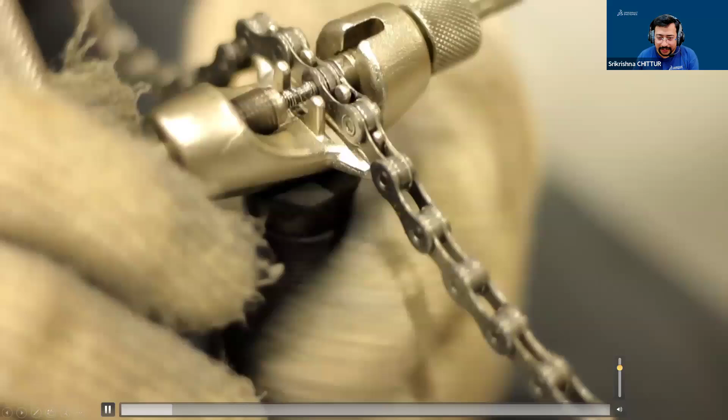I don't know if you guys can hear the audio. Can you? No, cannot hear the audio. Yeah, but this would be great for Leandro to kind of talk a little bit about Caloi as a company.

Yeah, so Caloi was founded in 1898, by Luigi Caloi.

Today we have 126 years, so it's a long time for manufacturing bikes. We have the office in São Paulo, Brazil, and the factory at Manaus, which is like 3 or 4 hours from São Paulo.

Today we have the Caloi team of athletes training, including the guy who won the World Cup last year. He's ranked, but today is a training day for the other Caloi athletes, as they compete for the leagues inside Caloi, World Cups, and other championships inside Brazil.

We also have good news regarding the off-road bike we developed last year. Today we're seeing good results with these athletes who represent Caloi inside Brazil and out in the world.

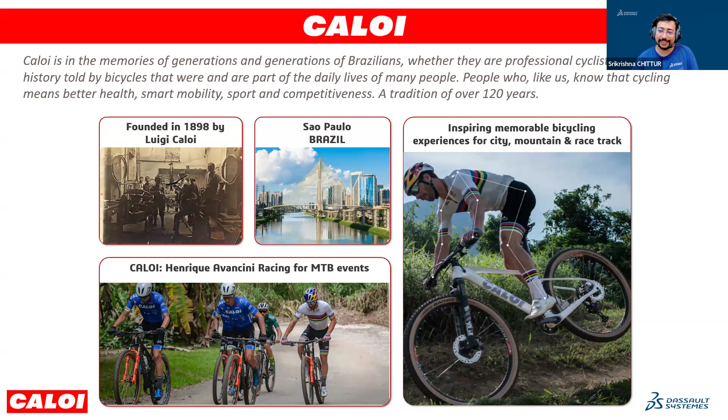Okay, I think I got the video working. It's a pretty cool video, we should share it with the audience. Let's try it one time. Alright, let's see if it plays. Come on, do you hear the audio?

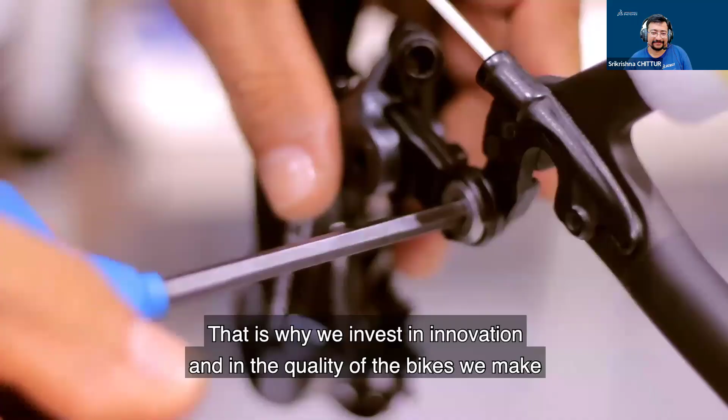Wow, that's a really, really nice video, man.

Nice video. It covers your entire portfolio and how closely it is connected to the life of Brazilians.

So let's switch gears. Tell us about how you're leveraging SolidWorks to design and visualize your bicycles. We'll get into details of bicycle development later, but just at a high level, we see these models here. Tell us about it.

This is a kind of model that launched last year, 2023. We launched around 4 models: Explorer Sport, Explorer Comp, Explorer Expert, and Explorer Pro. These are 4 different models.

These are different levels for users, because each model has different components at the entry level and the high level. In each model we have 5 sizes, from extra small to extra large, in different colors, so there are many bikes for the public — different colors, different sizes, and also different mechanisms, like gear and sprocket mechanisms.

Materials would be different too. For example, the Explorer Comp has 8 speed, the Explorer Expert has 9 speed, and the Explorer Pro has 10 speed.

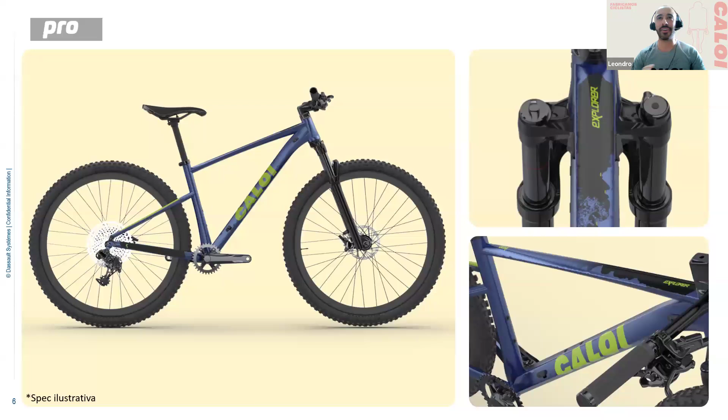For explaining the day-to-day process of frame development, I will share my screen on SolidWorks to introduce you to the day-to-day work of me and Danielle in developing frames. Excuse me, let me share my screen just a second.

One question before we jump there — when Ronit and I were talking to you yesterday, you mentioned that these are renderings done in SolidWorks Visualize. Is that right? Yeah, exactly.

When I finish the 3D drawings, we share them with my design team to make our renders through the software Visualize. These renders are used to decide colors in meetings with directors and management, who decide what color to launch. It helps bring realism to the bike at the end of the process, so we can decide with the team, the commercial team, and the directors, and present the cost of the bike and everything else.

Man, that rendering is amazing. I'm not sure if you guys are as impressed as I am, but that looks like a great bike rendering, so great job on that. It's very close to the physical, real look. At some point we'd love to see the real bike placed next to the rendering, side by side. Yeah, very cool — we've seen so many different types of bikes on your website.

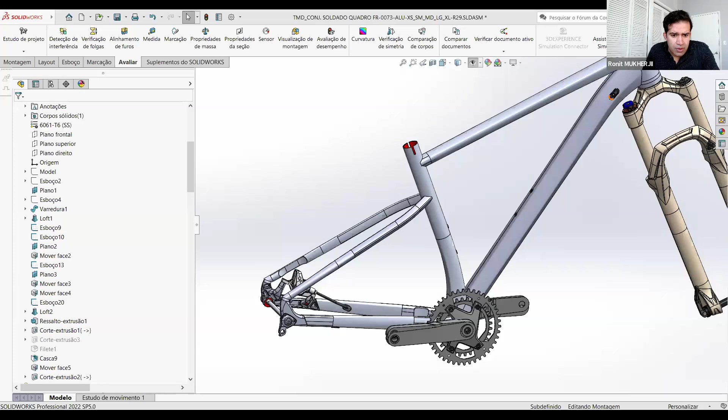Here we go, something's happening on screen. This is the model that you saw in the previous slide. So here's how the structure of this bike works, let me explain a little more about the frame.

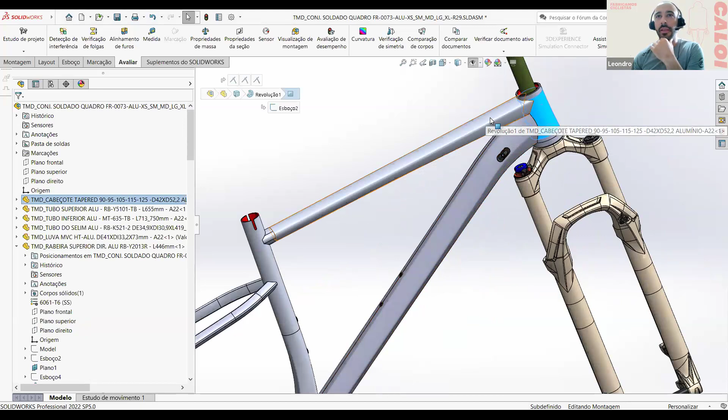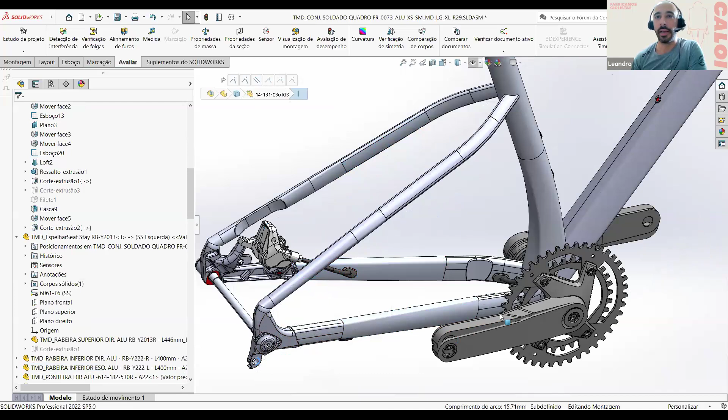We have this tube which is called the head tube, and we have the top tube. This tube is the down tube, seat tube, and we have two seat stays, left and right, and the chain stay, left and right, with dropouts and a hanger that we can assemble onto the derailleur, and in the middle we have the bottom bracket. Before this, we begin to develop the geometry — just a second while I look for the geometry here.

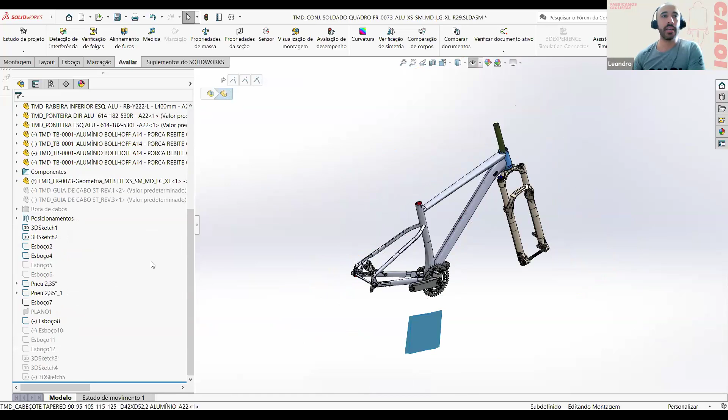Let me see, I don't find the geometry. Oh, okay. So I didn't find the geometry here, just a second, I'll open this here. Oh, there you are, okay. It's very slow, my computer.

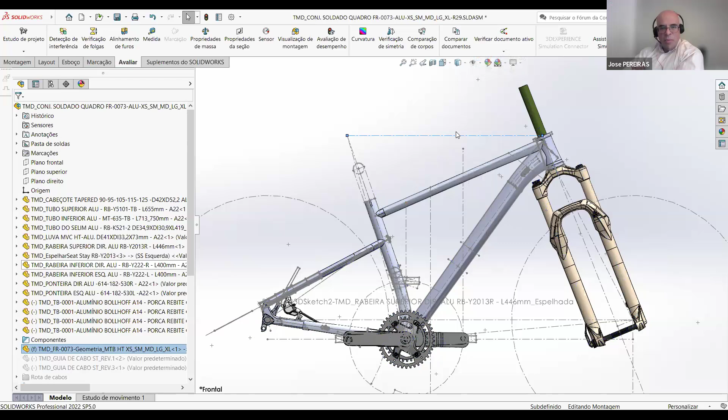No worries, we see the drawing. Yeah, we see that. All the sketches, let me hide some. So this, Leandro, is the first sketch that you based on for drawing every single 3D part, right?

Exactly. Before constructing the bike, we decide the measurements we choose for this bike, because the measurements determine if we have more velocity or more downhill capability, more dirigibility. This measure decides the behavior of the bike when you ride on the roads of the city or on the trail. So this part is very important for us when deciding these measurements of the frame.

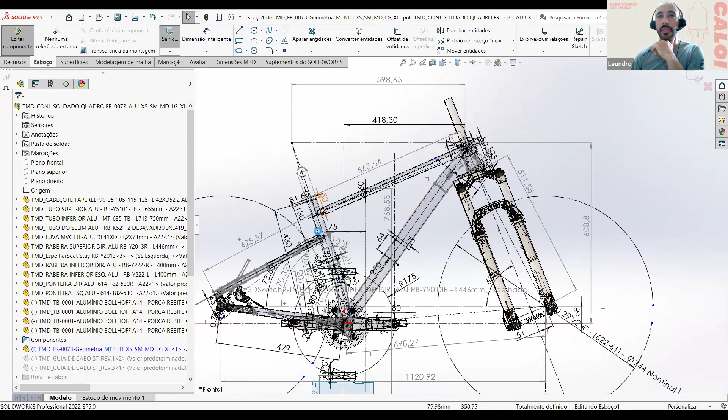This is the initial step that defines how comfortable a ride will be for someone. We do research on the website, for development, with colleagues like other brands inside Pon Bikes, and decide the measurement.

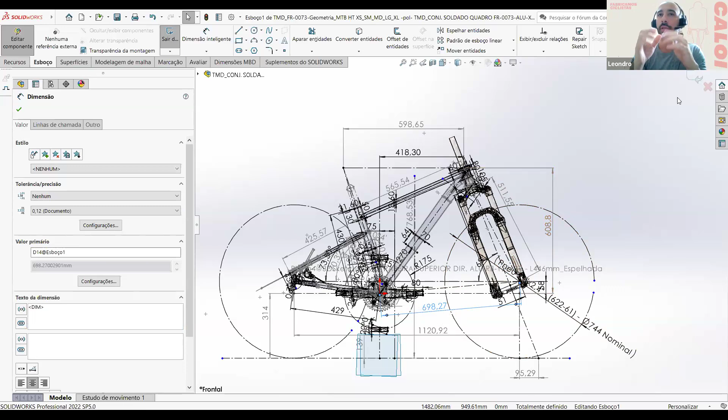We talk with my director and decide for this product, and when this measure is consolidated, we begin to develop the frame and how to construct the tubes. We talk with the design team for ideas on what profile of tubes we would like to input into this kind of project.

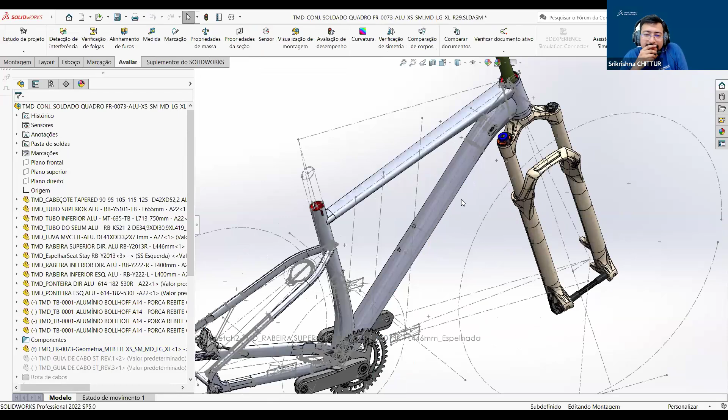So, until arriving at the assembled bike. The parametric geometry for all sizes, Leandro? Yeah, exactly. Daniel said that's very important - how to construct the many sizes, from extra small to extra large.

We use the tools inside SolidWorks that give us parametrics for these sizes, so I can change the size, and it's easier to show the other guys the proportions of the frame relative to the size.

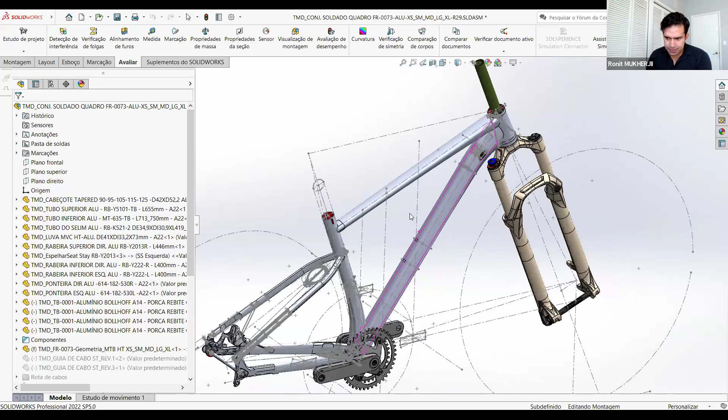So do you guys use design tables for that, or how do you manage the configurations? In this moment I don't have a configuration, but we have a lot of models that have this configuration. So another part is I make analysis with components, like for example, you have a suspension fork in the front of the frame.

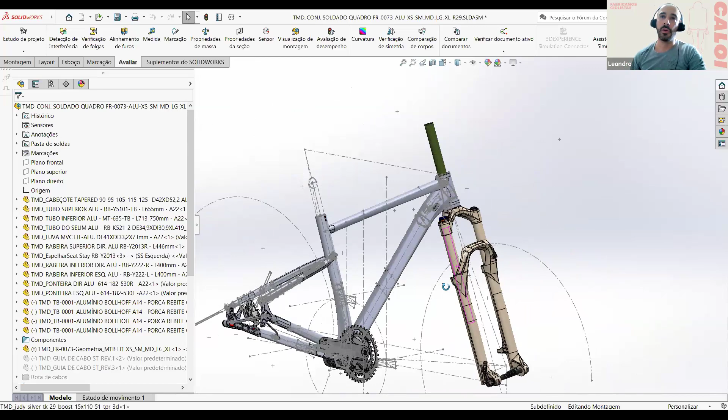We analyze if I have some interference when we give the circle of the fork suspension. We check if we don't have an interference with a down tube like this. We also make the interference check with a crankset and a chainstay, so you need to make sure.

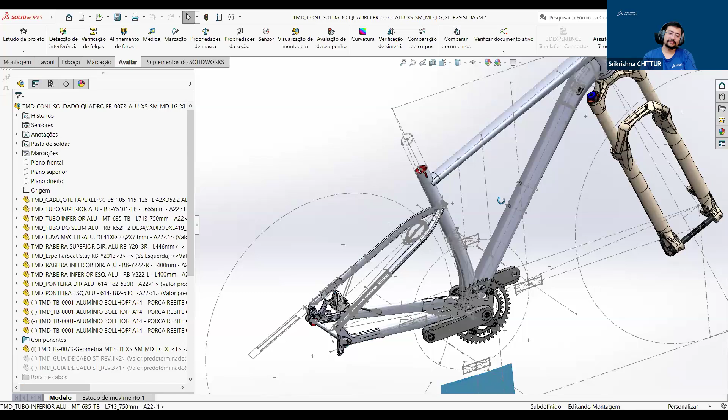We make the analysis with the tire, checking if we have good clearance between the tire and the chainstay. So these are the main parts that we analyze in this process together with the specification team.

Okay, this is very interesting. In fact, we got two questions from social media, it would be great if you can answer that. Can you bring back the geometry? Can you show the geometry again real quick? I think these would be super simple questions for you, but okay, let's go.

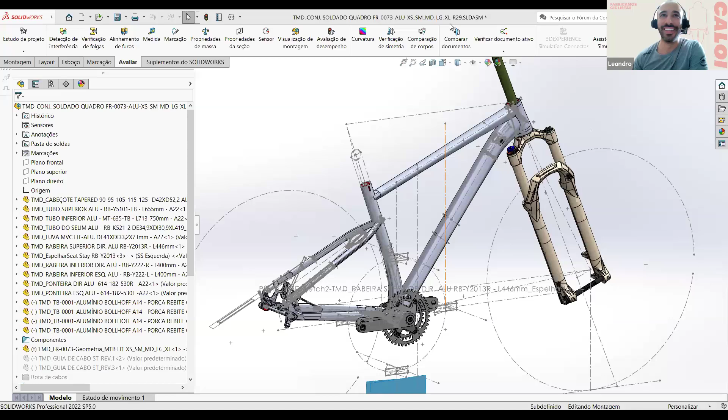I already saw, Sri Krishna, while we do that, the aspects of SolidWorks that I already showed them was being able to create amazing renders without having a product ready. And this other aspect Leandro mentioned was interferences. You got an interference check, we had not thought of that. That's pretty cool, so many components in there, so much movement happening, of course we gotta look for interferences.

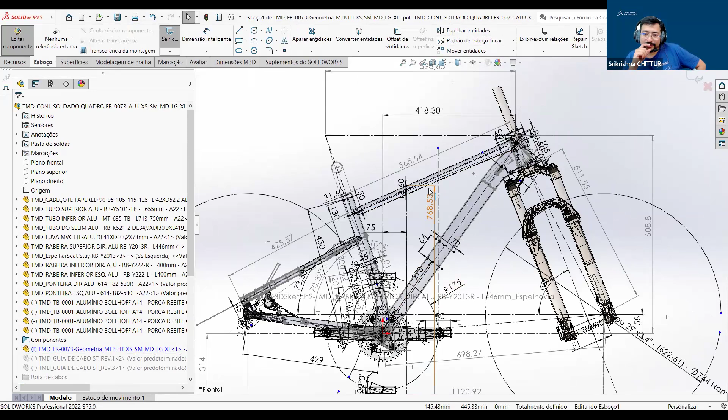That's amazing. So can you get out of the sketch, Leo? Let's look at the 3D geometry real quick. Okay, exit from the sketch. Yeah, the sketch. So now can you zoom near the connection of head and top tube?

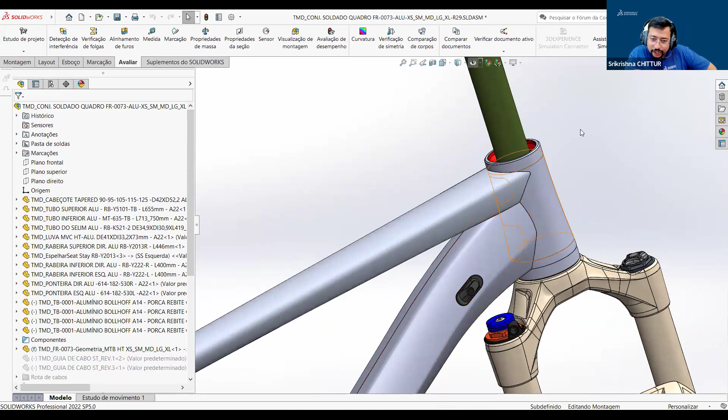Top tube, okay, so right here. So there's a hole with a black closing, right? There's a hole on the side. So one of the questions was, hey, isn't that hole introducing stress concentration when you're riding? Yeah.

We will arrive at this part when I talk about the tests of the bike. So we understood beforehand what's the better point to put this hole to avoid extra stress on the bike and avoid the appearance of a crack. So we already make the tests before the launch of the frame, we have to pass the five tests that I will comment on in the next slides.

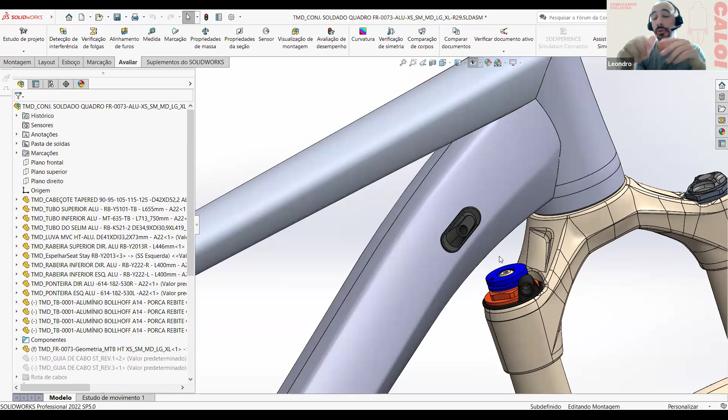But sometimes we have a problem about this hole. We can move it to a better position to avoid this kind of stress. But these are good questions because sometimes we have this problem.

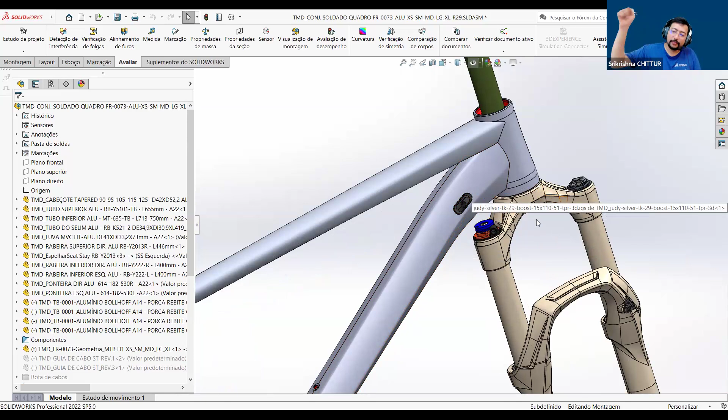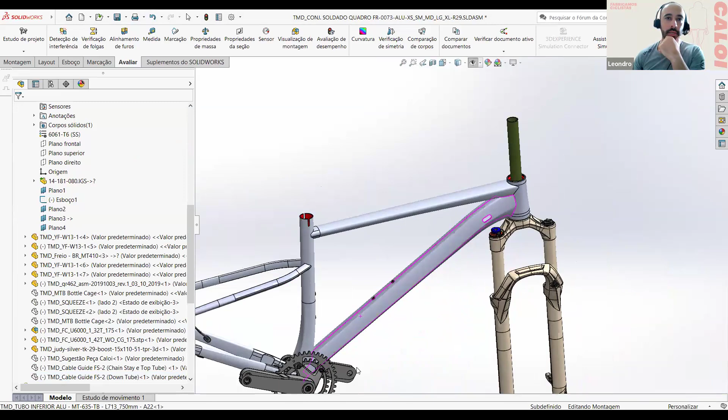But the reason you have a hole there is to route the cables from outside to inside, right? Yeah, let me hide this, so, on both sides. Ah okay, so that's where the cables go inside that tube and they come out from the bottom. Yeah, exactly. I think that answers one of the favorite questions on LinkedIn.

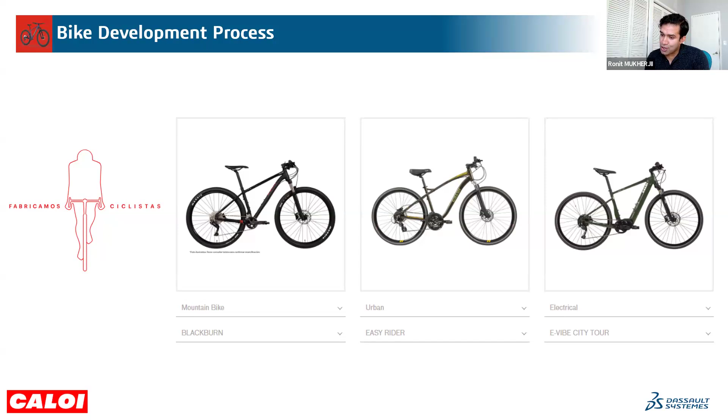It's a lot of critical goals over there - you want to make it lightweight, you want to make it strong, you want to make it last for a long time. And how do you do that without the necessary tools to tell you that information? So I did see the next slide accidentally, and I saw some tests over there. So I'm already curious, and I love testing too. So what is happening over here?

We showed everyone the standards we have in the world of bikes. The first standard is ISO 4210, specifically for mountain bikes, urban bikes, city bikes, and everything for 29 inch bikes. ISO 8098 is a standard covered for young bikes. And the last one is standard EN 15194, which covers e-bike frames.

So we have three standards covering the tests we need to make after the process of developing prototypes. With these tests, like I said in the previous slide, we get the certificate of the product, where you have durability, resistance, and so on.

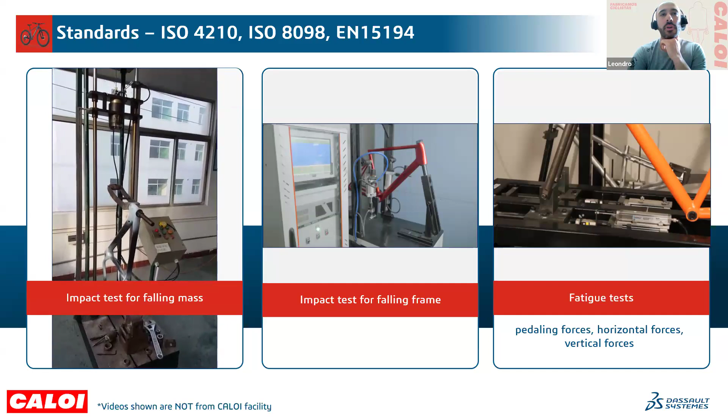Maybe we start with the impact test first. This test is for studying how the head tube decomports together with the top tube and down tube, testing resistance for impact, like a rock or anything. It's like a crash test, a high energy event, and we want to analyze that.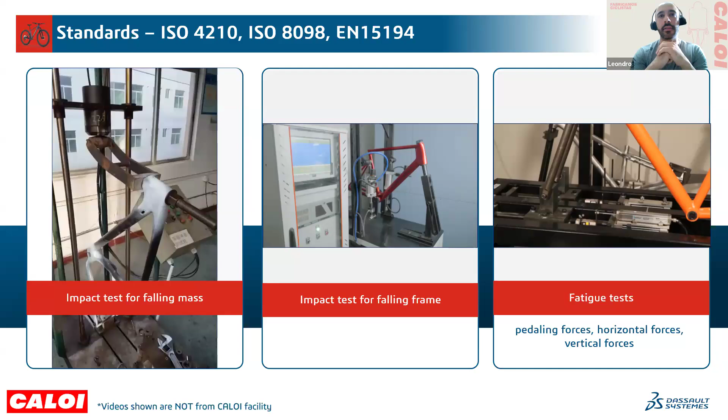What about falling frame? Falling frame is another impact test. For example, we put some mass in the frame to represent the weight of the person on the bike, and we test it two times with this.

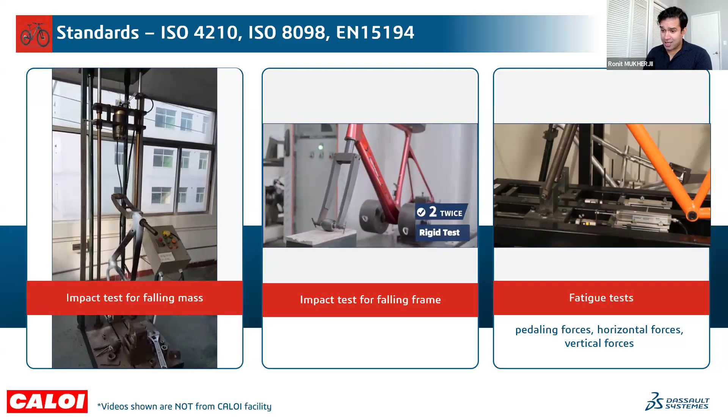I'm looking at a person doing a wheelie, and the wheel comes down, you want to be analyzing that. It's gonna be fine, guys, the bike is gonna be great. Keep popping those wheelies, smashing 100 kilos of wheelie.

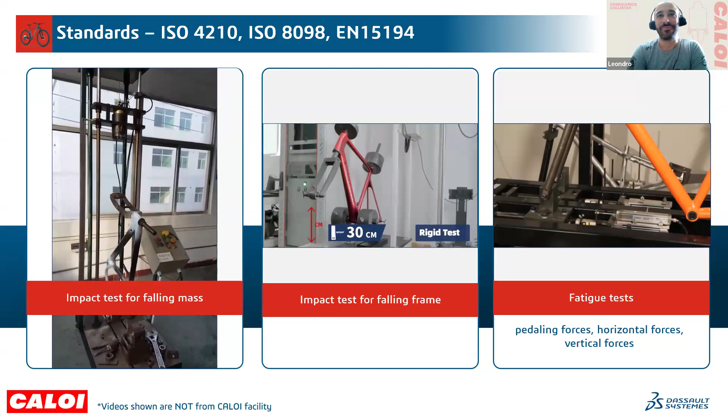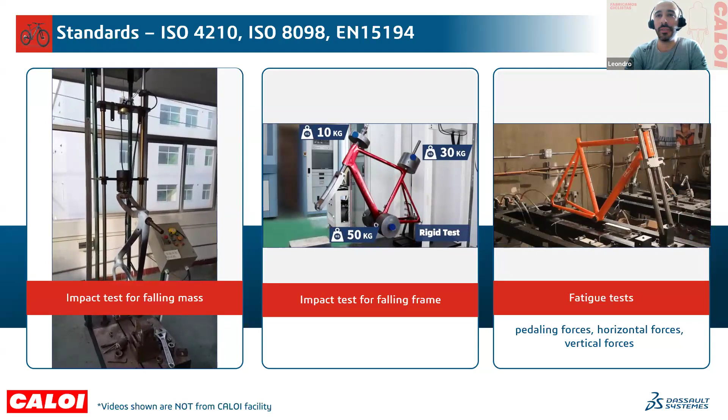Let's go from crazy riding to responsible riding, which is the fatigue test. This fatigue test represents the whole frame. We apply 1,200 newtons of force forward, and 600 newtons in reverse. The target is around 100,000 cycles. After this, if no cracks or breaks appear, the frame is passed and certified.

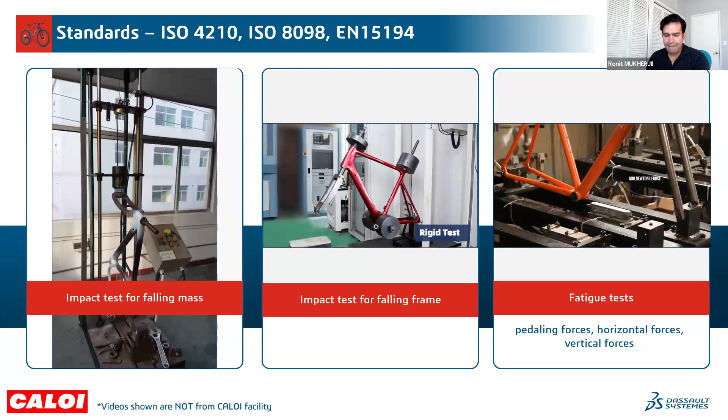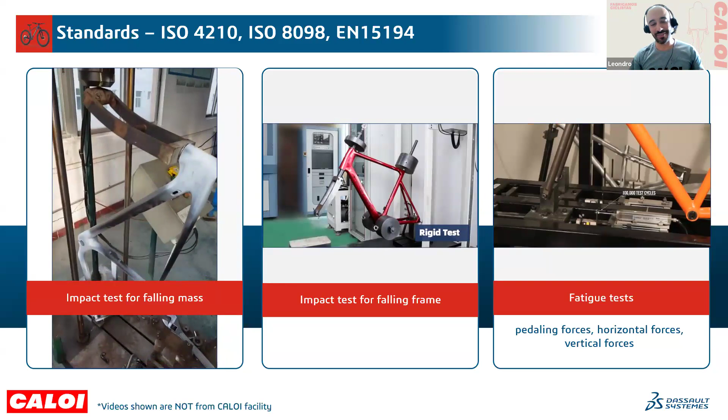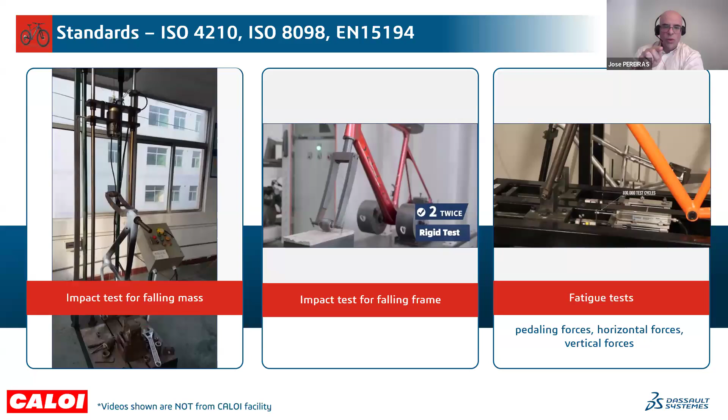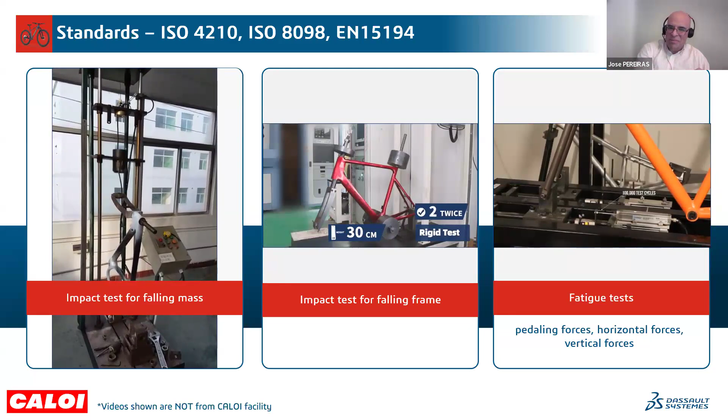Simulation is very important for you because you don't only have to pass those tests, you are optimizing those frames, looking for the lightest frame. So you're on the edge, needing to reduce mass versus strength. Yeah, exactly, that's one of the main challenges for us. You can create many possibilities before developing the prototypes.

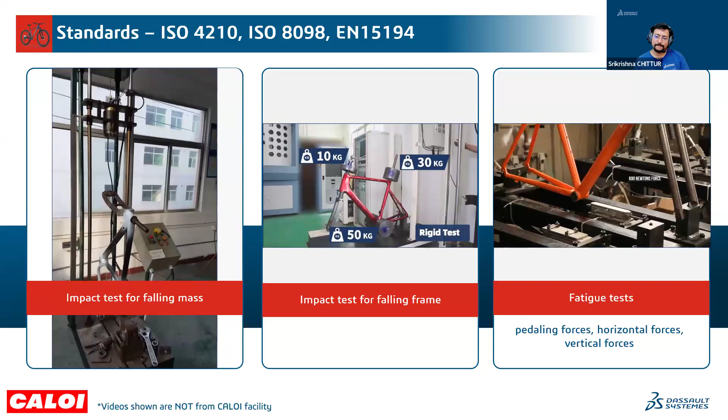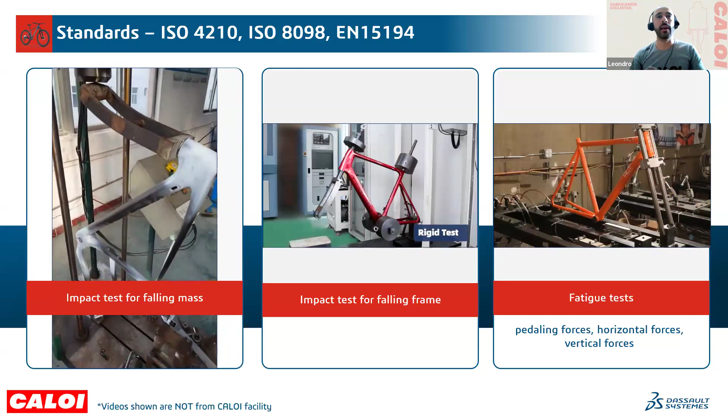Just out of curiosity, no numbers required, when you send these tests out to different labs to run, are they pretty expensive to run? We have the lab in China, with many brands inside of Pon Bikes sending their frames for this lab. We have the opportunity to send our prototypes to test our frames.

Are they expensive tests to run when you send them out? Not much, because it's inside the brand. Oh, it's internal, part of the brand. Got it.

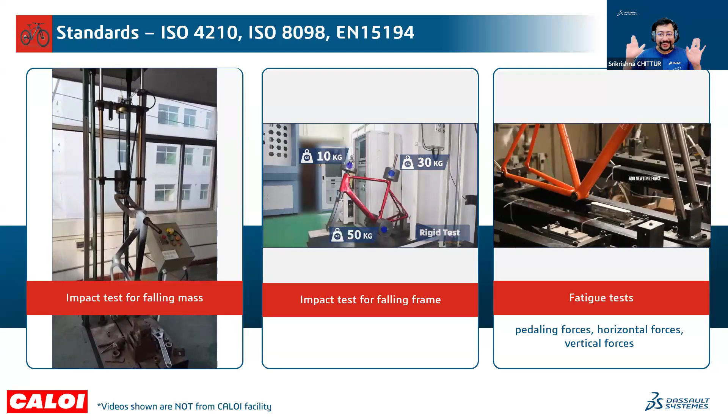Also, since you mentioned you have your own secret test setup, I just want to make it clear to everybody that all the videos you're seeing are not from Caloi. Yeah, exactly, it's just similar plans, the idea is there, but it's not all from Caloi.

This is a great topic for all of us. We've talked about your journey, and in every journey there are challenges. With a big product like Caloi, there are obviously engineering challenges you've come across and tried to overcome. Can you talk about some of the engineering challenges you've seen over the last few years and how you addressed them? Actually, as a company we always have challenges for our kind of products. With us it's not different, we have challenges, we have goals.

So when we talked with CADWorks about bringing Simulia, it was to bring this challenge for us: we've reached 42 models in 2 years of innovation with e-bikes. So this is the process of reaching these challenges, but I can say I have good numbers yet, in the process of developing the project with Simulia and SolidWorks together.

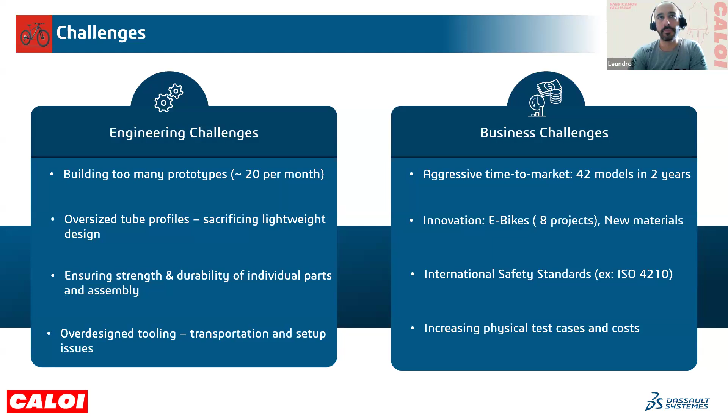These engineering challenges and business challenges, Srikrishna, this kind of resonates in pretty much all the product development companies. Yeah, this is great, it's very similar, just different flavors.

Believe it or not, we're already 3/4 of the way and we still haven't talked about simulation, so we're going to run through the next few topics quickly. Maybe you can share your journey of going from SolidWorks desktop to a cloud-based 3D experience platform for your simulation needs.

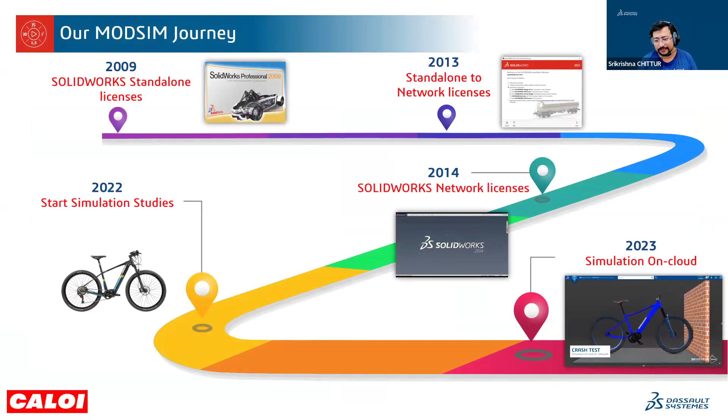Yeah, we've been a long time with Dassault Systèmes. We began with SolidWorks since 2009, and last year we got introduced to Simulia inside of Caloi together with the partner CADWorks. Today, in the process of learning the simulation, introducing the tests is standard inside of Simulia. As I said, I have good news, good numbers in this moment with Simulia - it's a good software, very simple to change the toolings inside.

It's very easy to customize it. It's basically like your virtual test environment, where you're able to create new virtual prototypes and run different types of tests without any physical effort or physical time.

Exactly. When you use SolidWorks together with Simulia, you can change your design and it automatically updates the framing and the simulation. It's very easy, very cool for us. That integration is very powerful.

So you stick with SolidWorks all around, and then a couple years ago you guys introduced simulation on cloud. You do your designs in SolidWorks, push the model into cloud simulation, run the test. If you don't like your results, you can make a change and auto update the designs in simulation. That's powerful, man.

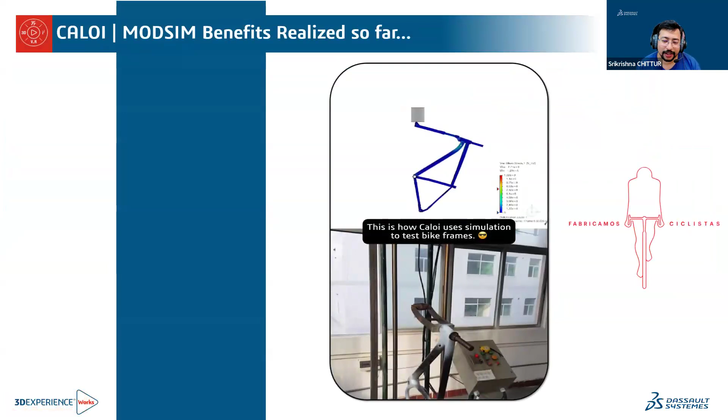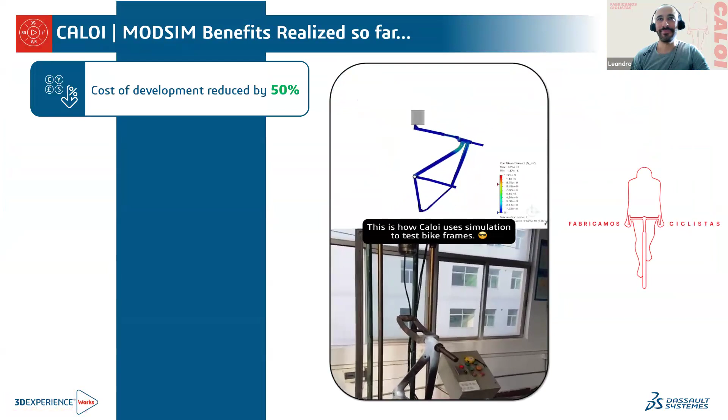Straightforward. And that actually puts us ready to talk about the benefits you guys have realized. When we were looking at this, we were blown away - because of using simulation. And for our audience, yes, we will talk about simulation in a few minutes. But because of simulation, you were able to reduce the costs, time, and effort. Tell us a little bit about this - this is really impressive.

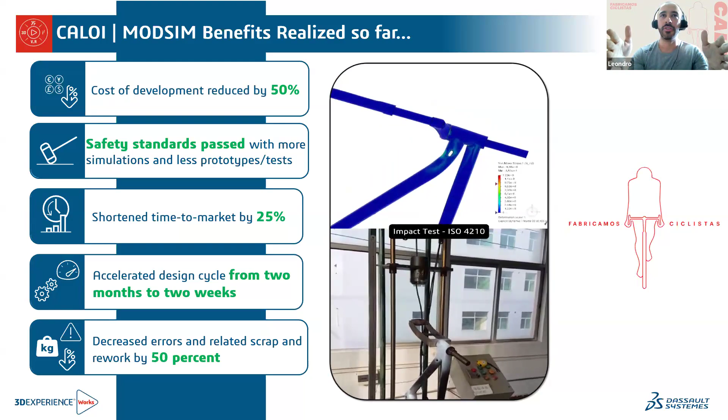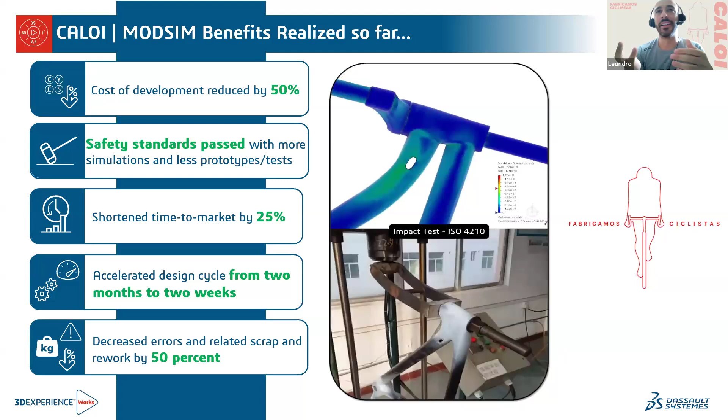Yeah, so 2 years ago we suffered - that's the starting content at the beginning of this meeting. We had a certainty that we have 3 months to develop the frame. So always we develop a new frame and we retest 2 times. So we're talking about 180 days - wow, 6 months. So we don't need this. We just need 3 months, we solved this problem, and the cost of development was reduced by 50%.

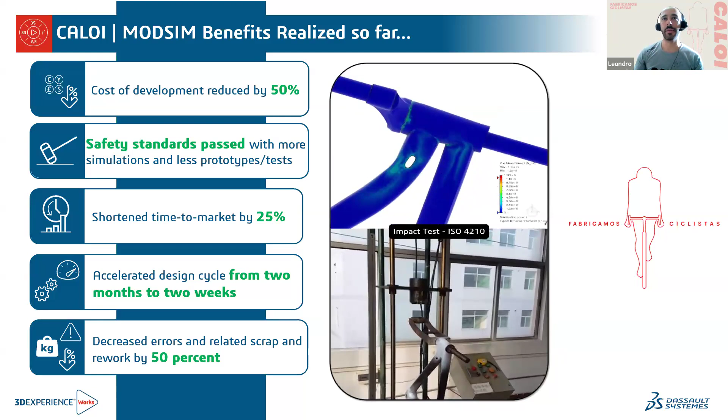Safety standards passed with more simulation, fewer prototypes, so you don't have to manufacture more prototypes. It shortens the timing and accelerates the design. We can launch before the competitors - so you can beat the competition. Yeah, and the companies are very happy with these results.

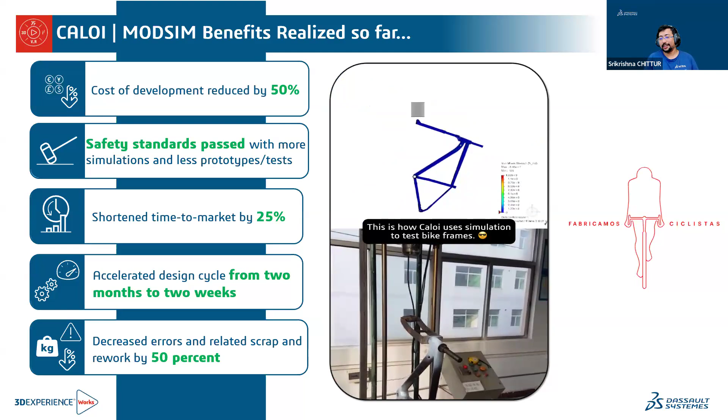Okay, I mean this is amazing, by the way. Kudos to you guys and CADWorks and our friend Jose who's on the call. Let's dive into the details of the simulation, which our audience has been patiently waiting for.

So let's talk about the first one, which is the impact test example from ISO 4210. You have explained the test earlier - correct me if I'm wrong - basically you have a specific load that you drop, and you check if the bike can withstand that load, several of those loads, right?

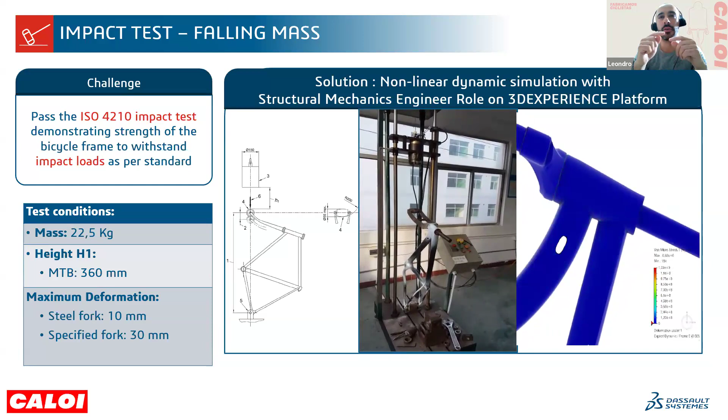Right, yeah, exactly. We have this test 2 times. And we analyze the difference of the measure that we call the wheelbase. wheelbase is the measure between the front axle and the rear axle. If I use the steel fork, the difference of the measure can't be more than 10 millimeters. If I use the fork suspension, it can be more, up to 30 millimeters. Okay, if it's less than this, the frame is passed.

Okay, so when you performed simulations to check for this deformation - obviously these are very complex simulations because there is contact happening, a lot of deformation, a lot of nonlinearity. This was done with the 3D Experience platform using the Abaqus solver. How close were the simulation results in comparison with physical tests?

Yeah, as I said, we are in the process of converging these numbers. So the idea is we make the simulation at Simulia, and at the same time we make the physical tests, and then begin to compare. And if it's not equal, we can change, for example, the thickness in the 3D drawing that's not correct compared to the real test. So we can find the points that bring the same numbers in the end of the comparison.

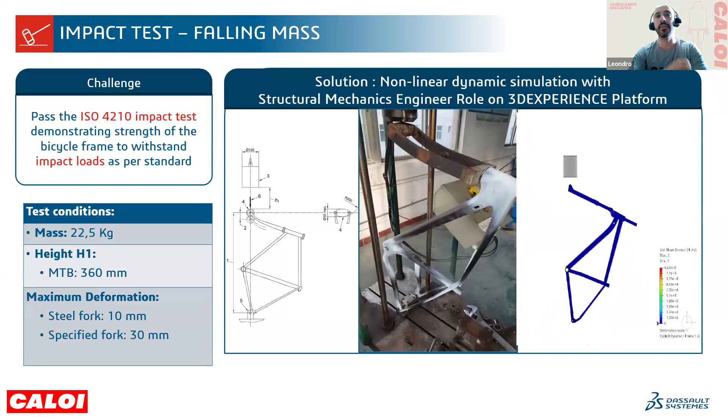So they perfectly match the physical test? That gives you confidence. So then you cut down the number of physical tests, replacing it with simulation. Exactly, right, CADWorks helped us with this matching of the tests. Very good - yeah, so the support part that you mentioned earlier.

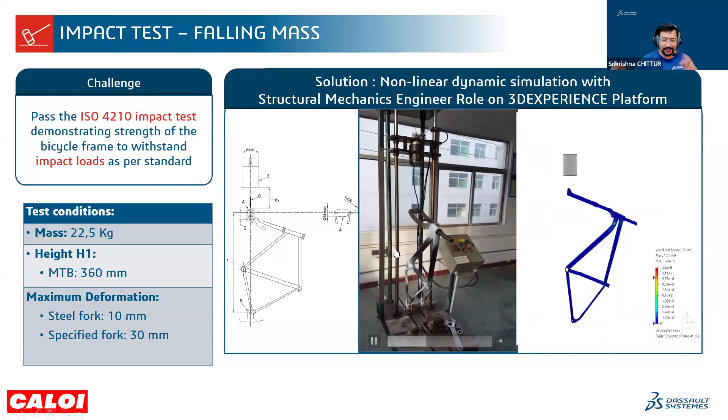And just for the reference of our audience, the simulation results you're seeing are from Caloi, but the physical test facility is not from Caloi because it's secret. But this is standalone - we make a similar version of this test in our lab.

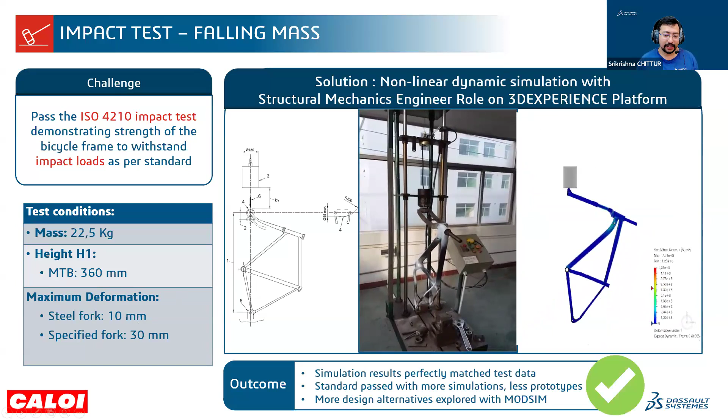Got it. Okay, let's switch gears from impact test to durability, which is also quite interesting. Let's talk about that in a second.

So you explained earlier that you have to pass a minimum of 100,000 cycles in 3 different cases. There's a pedaling force case, a horizontal case, and a vertical case. When simulations were performed, how close were the results, and what design changes were made because of the simulation?

I presume that would be one of the next steps at Caloi. So it looks like in this case, most components pass the test. You notice some cracks, but that's addressed with the welds. Very insightful information.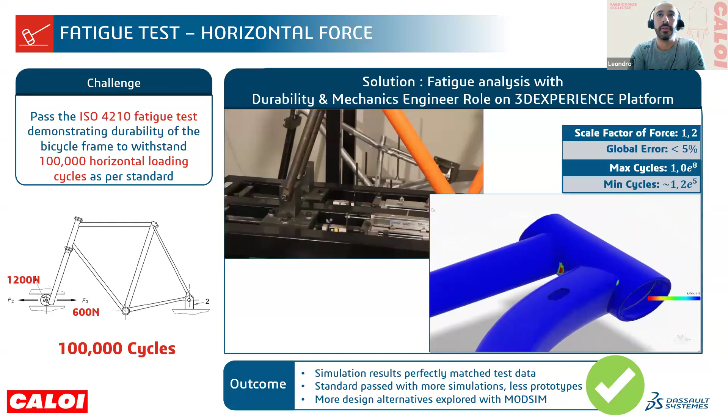Okay, I guess it's time to talk about the future. So next year, Caloi will launch 6 new electric bike models. We call them e-bikes. We have motorbikes, urban electric bikes, and all mountain bikes, which is a specific kind of bike. So the future is electrical.

We can bring this kind of technology inside Brazil. Caloi has been thinking about this for a long time, and we already launched bikes like this. This model we launched in 2022, it's an electric bike, but we can launch much more and introduce this technology for Brazilian customers.

It looks really cool, by the way. Yeah, and I just have a follow-up question.

So this is a commuter class or city electric bike. Do you have plans of electrifying any of the mountain bikes or other types of bikes? Yeah, two of these 6 models we're launching for the next year are mountain bikes.

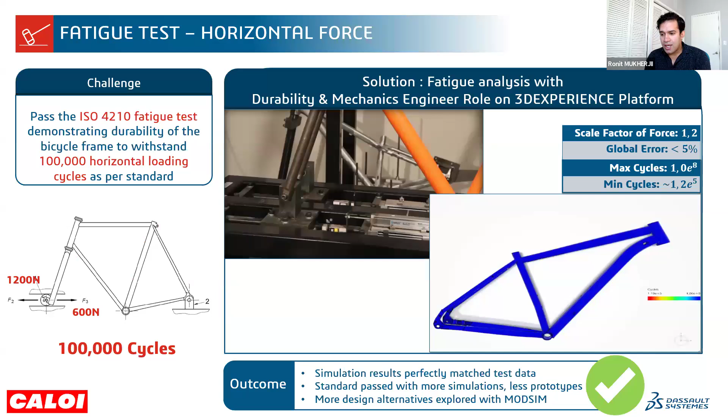But we were able to see how Caloi uses 3DEXPERIENCE Works simulations to get a lower number of prototypes and get more testing done. So basically, they're accelerating their innovation. And of course, while they're doing that, they have to adhere to international safety standards, so these tools help them achieve those standards fast as well.

Now, the best part about what you mentioned, Leandro, was how SolidWorks is integrated with the simulation on cloud, this 3D Experience Works simulation. So you can make your design, send it over to the cloud to run some analysis. You don't like your results, you can iterate on your design, make changes, update the design on your end, and this flow of information from SolidWorks into the cloud simulation is seamless. It makes life easy because you don't have to worry about importing and exporting different file types. And with these high advanced simulation tools, you're actually running some pretty complex simulations.

Just looking at a drop test, it's not an easy test, it's a very complex test. It looks easy, but there's a lot of dynamics going on in there. So with these tools, we're able to solve those problems very fast. Like Jose mentioned, with the power of cloud computing, you're able to solve something that was 6 hours into 20 minutes. I've heard tests that take 2-3 days wrapped up into an hour, 2 hours, 3 hours max. So that's a significant time save, and as an engineer, you want to be able to innovate.